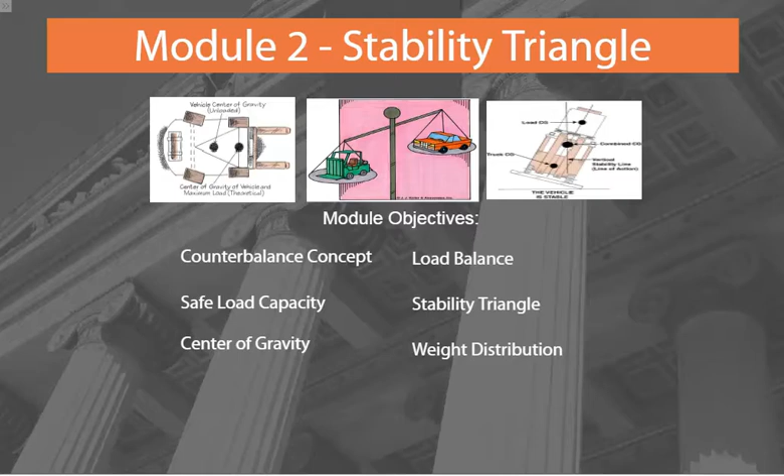There are many classes and types of forklifts or powered industrial trucks. There's everything from the common sit-down type to the narrow aisle stand-up type, and from order pickers to powered pallet jacks. They may be powered by electricity, LP gas, diesel fuel, or gasoline. Some are approved for use in certain hazardous conditions, and some aren't.

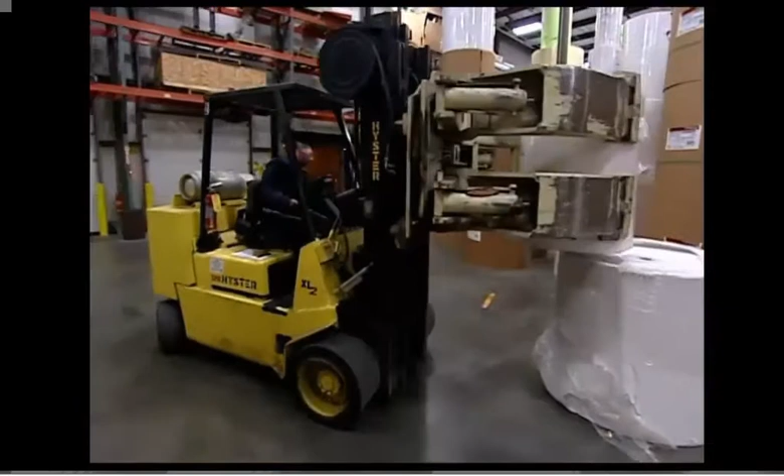If you've operated a forklift before, you know they're not like automobiles. For one thing, they steer with the rear wheels, the exact opposite of most vehicles, a concept that can take new operators some getting used to.

Because they steer from the rear, forklifts can turn a much tighter circle than a car. And while forklifts may seem like they can turn on a dime, they're not known for their maneuverability. Anyone who expects them to stop or swerve as easily as a car is in for a rude awakening.

Forklifts can also weigh 2 or 3 times more than a car. Makes sense, right? Forklifts carry heavy loads in the front, so to balance the load, they have a counterweight over the rear tires to prevent them from tipping forward.

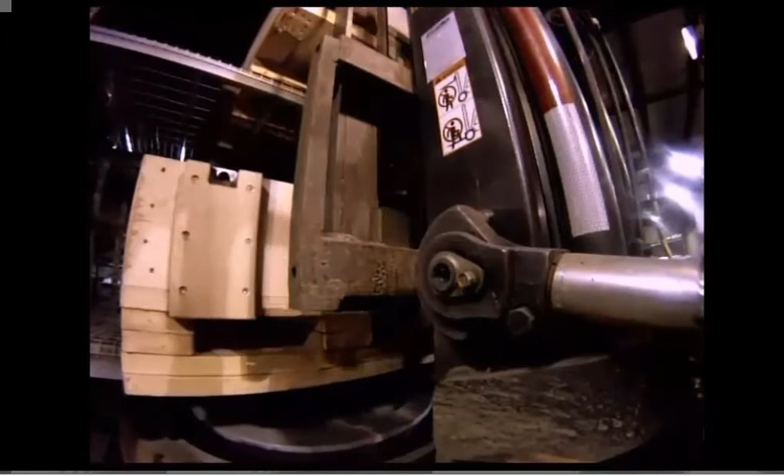Speaking of balance, every forklift operator needs to constantly think about keeping their unit from tipping. A forklift works on essentially the same principle as a teeter-totter. The weight of the load on the forks must be counterbalanced by the weight of the forklift body. Simple enough. But how do you know how much of a load your forklift can handle?

The primary source of this information can be found on the forklift's nameplate, also known as a data plate, capacity plate, or ID plate. The nameplate will state the capacity of the forklift - the manufacturer's guideline for how much weight the forklift can safely lift. For example, this nameplate indicates that the forklift's capacity is 5,000 pounds at a 24-inch load center to a maximum height of 130 inches. Exceeding this capacity can cause the unit to tip.

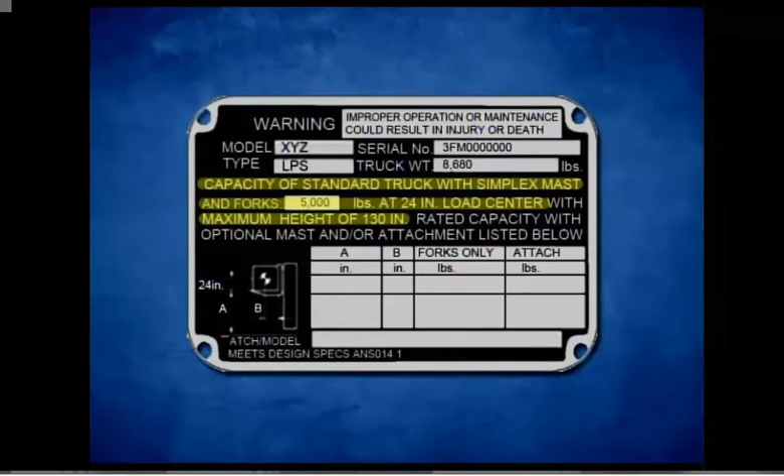The capacity data on the nameplate is critical information, but it was calculated using a load with a specific load center, commonly 24 inches. So unless every load you intend to lift has a load center of 24 inches, or whatever load center your truck was rated at, and is placed perfectly on your forks, you have to remember that the actual capacity will be reduced.

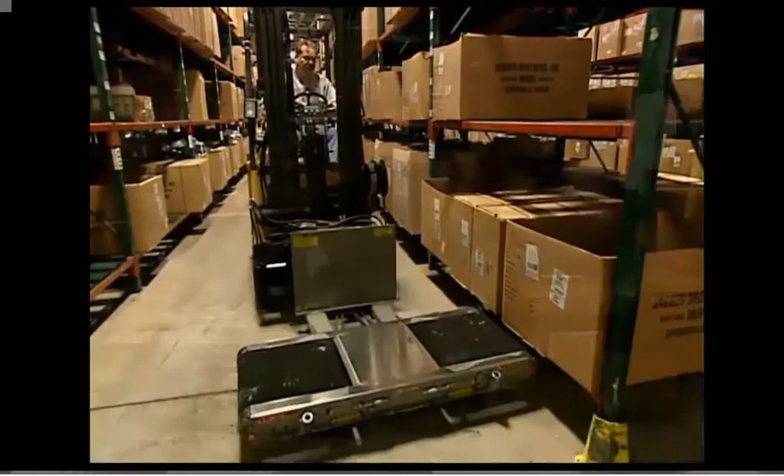The same thing goes for attachments, which also typically reduce capacity. When necessary, check with your supervisor to figure out the capacity of your unit to handle oversized or irregularly shaped loads.

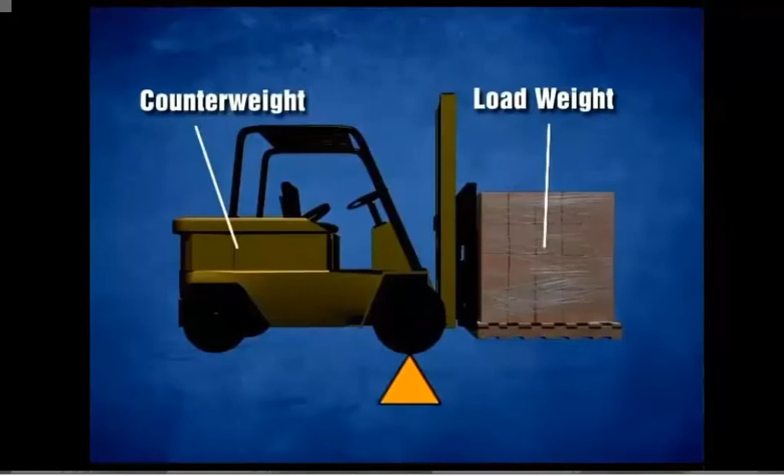The teeter-totter concept shows how a forklift balances itself on both ends. But there's more to a forklift's stability than that. You also need to be aware of 2 other concepts: center of gravity and the stability triangle.

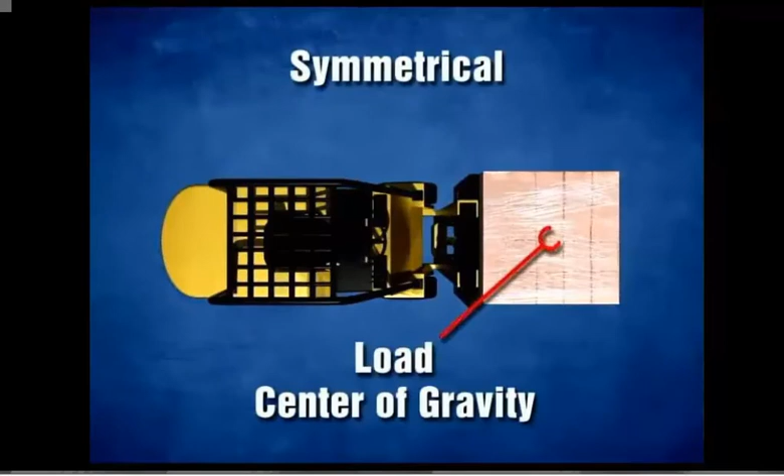The center of gravity is the point within an object where all the weight is concentrated. It's in the center of a symmetrical load, but off-center in an irregular load. When a forklift isn't carrying a load, you only need to consider the forklift's own center of gravity, usually somewhere near the middle of the unit.

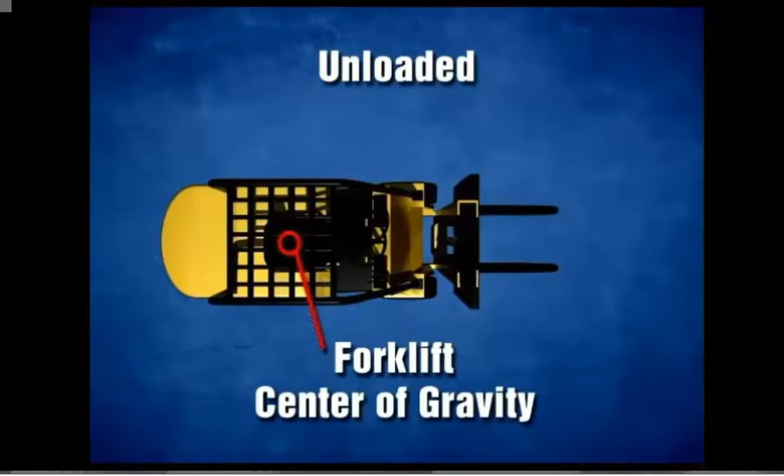But when you're lifting or carrying a load, you have to consider the combined center of gravity of the forklift and the load. The forklift will be stable as long as the combined center of gravity stays within what is known as the stability triangle.

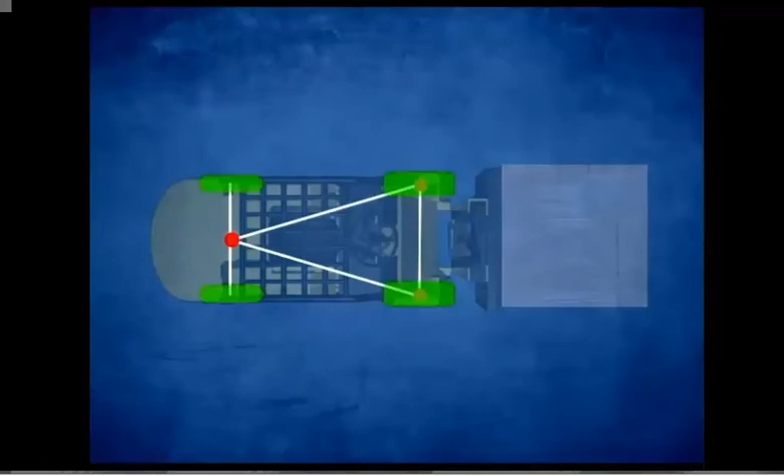Just what is the stability triangle? Forklifts use a 3-point suspension system that runs along an imaginary line between the 2 front tires and the center of the rear axle. This means that even though the vehicle has 4 wheels, it's only supported at these 3 points - the points that form the stability triangle.

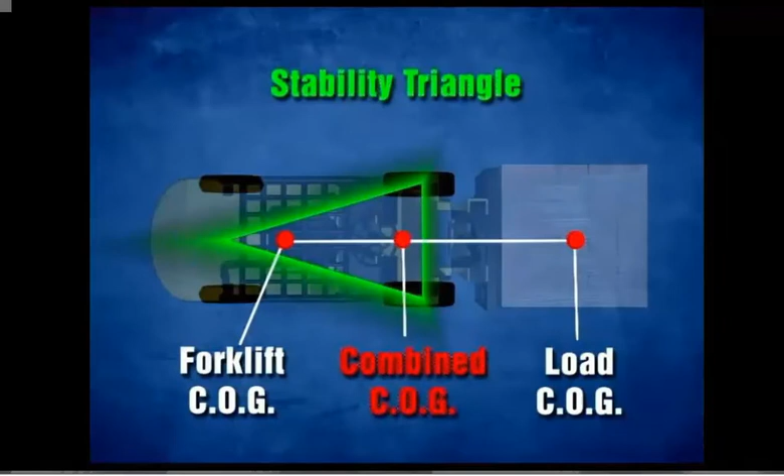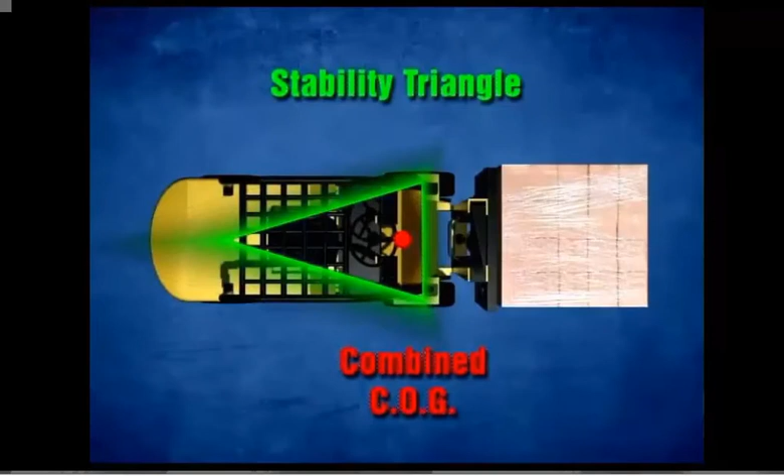So when we put center of gravity and the stability triangle together, you can see that the combined center of gravity has to be within the stability triangle in order for a forklift to be stable. It might help to imagine a line running straight up and down through the combined center of gravity. To remain stable, the bottom of this line of action has to be inside the stability triangle.

Many factors can impact whether or not the combined center of gravity remains within the stability triangle. The load size, position, and weight distribution critically affect the forklift's capacity and the stability of the unit. In addition, the dynamic forces created when the unit is moving, braking, cornering, lifting, tilting, and lowering loads are important stability considerations.

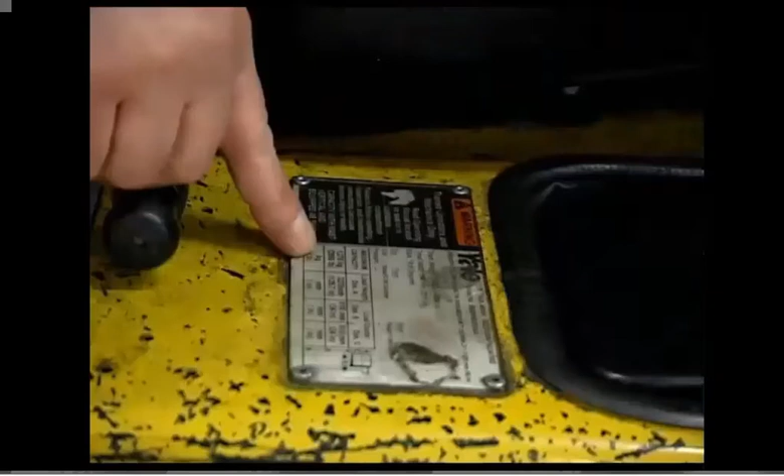It's up to you to know the load capacity of the unit you drive, as well as the weight and dimensions of any load you carry. Having said all that, you need to be familiar with the rest of the information on the nameplate, as well as the operator's manual and any warning labels, so you have all the facts you need to operate that particular unit safely.

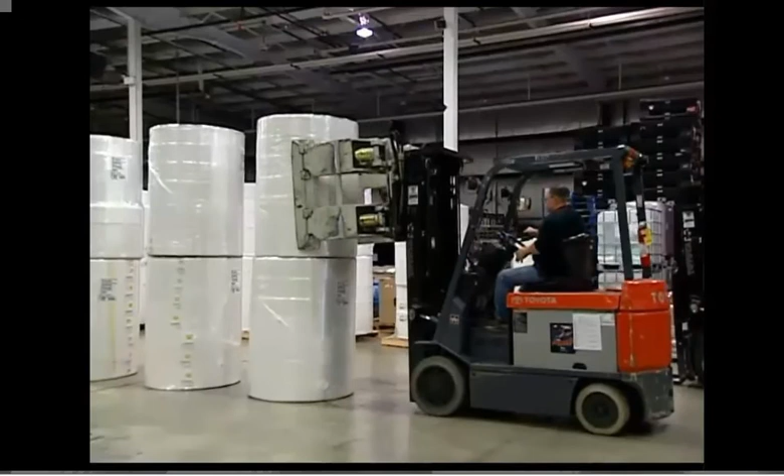It is important for an operator to understand the specs of the machine so that they know not only the weight limitations, but as well as the turning radius and the handling of that piece of equipment.

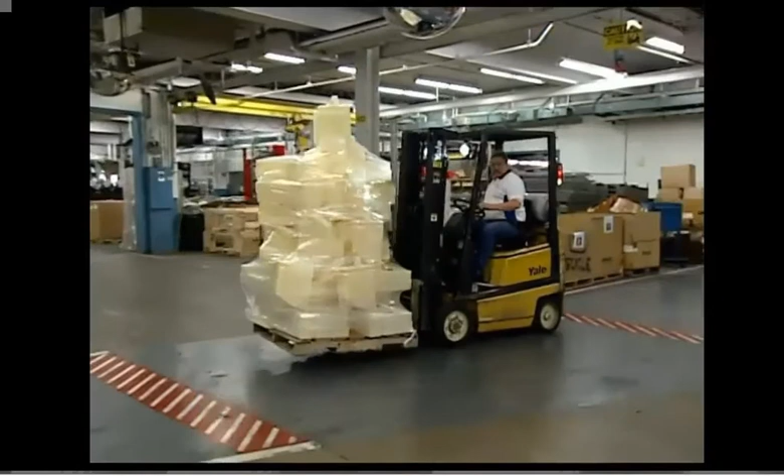Bottom line, stay within the forklift's rated parameters, and the combined center of gravity will stay within the stability triangle, keeping the unit stable. One more note: the information on the forklift's nameplate was calculated using ideal conditions. If a load is uneven, unbalanced, or off-center on the forks, capacity may be reduced.

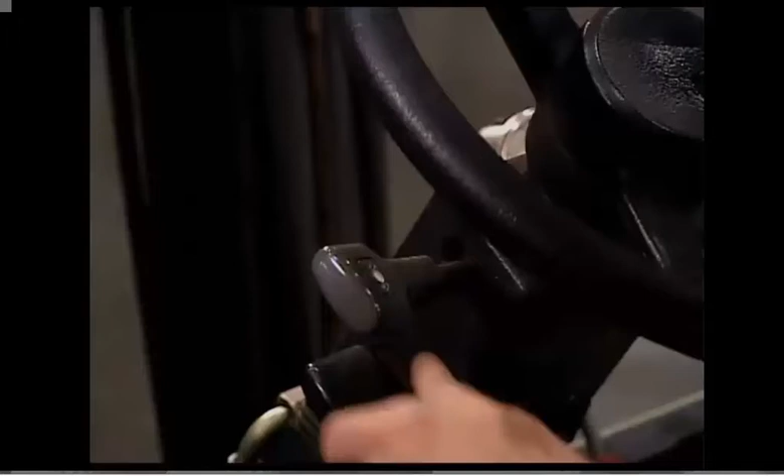If you've never operated a forklift, you'll want to get a good feel for the controls before you do it for the first time. These include the forward and reverse directional controls, lift controls, accelerator and brake pedals, and the parking brake. You should get the hang of these quickly with a little practice.

Okay, we've covered turning radius, combined center of gravity, the stability triangle, load center, and controls. You've got the basic operating concepts.